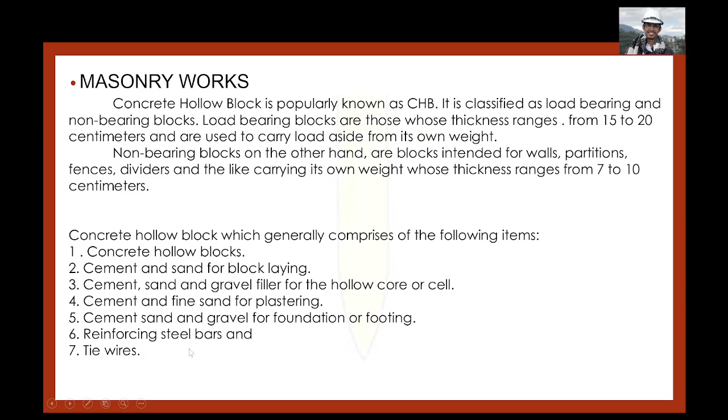So kapag tayo nagpapaasintada, or CHB laying, may mga bakal tayong nilalagay dyan. And also we have tie wires or yung alambre natin.

So we are to estimate masonry by area method, to solve for the number of CHB, kung ilang CHB ba yung kailangan natin sa isang area. So, typical CHB properties: we have the length of CHB that is 0.4 meters or 16 inch. And the height is equal to 0.2 meters or 8 inch. So, 8 by 16 inches ang size ng CHB natin.

So, thickness, depende yan, may 0.1 meter, this is 4 inches; 0.125 meter, this is 5 inches; 0.150, this is 6 inches. So in 1 square meter, there are 12.5 pieces of concrete hollow block. So this is our factor, 12.5 pieces per square meter. So in 1 meter by 1 meter, kailangan natin na CHB ay 12.5 pieces.

Next, we have the mortar. So ang mortar natin is dalawa, no? We have the mortar fill and we have the block laying mortar. So, for mortar fill, yun yung nilalagay natin in between the CHB, yung mga butas-butas niya, yung nandun sa loob.

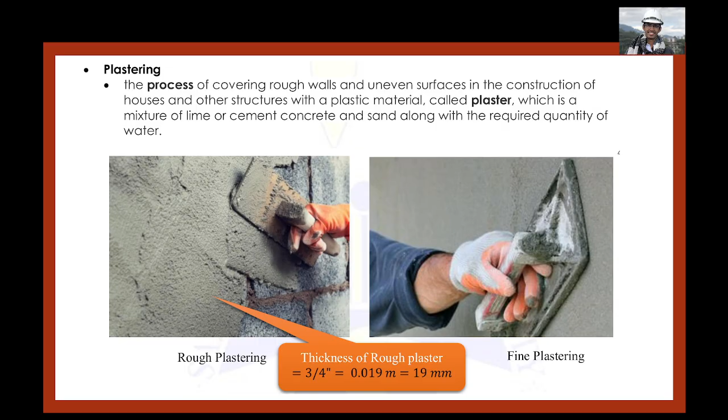So sa plastering, class, we have rough plaster and we have fine plaster. Rough plaster is the combination of fine sand and cement, and yung fine sand natin dito is yung nabistay. For fine plastering, this is just cement and water.

For our example, we have a wall here with a length of 6 meters and a height of 3.3. So determine the masonry works for the given wall section using 4-inch CHB. The wall is plastered on both sides. So napalitadaan siya on both sa harap at saka sa likod. And we are to use 4-inch CHB.

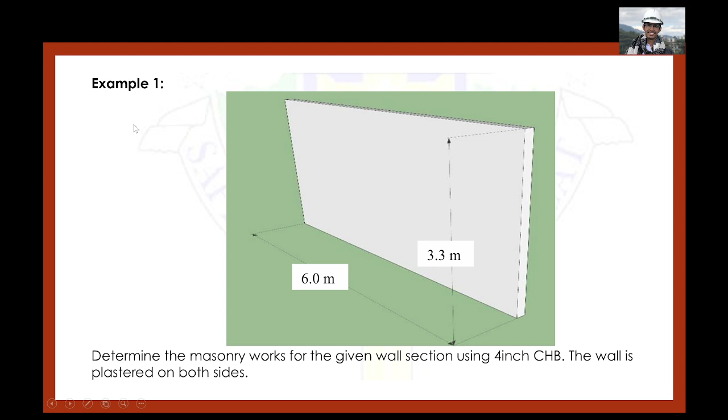So for our solution, we are to first get the number of CHB, kung ilang CHB bang kailangan natin for that area. So ang area ng wall natin 3.3 times 6 meters. That is 19.8 square meter. To solve for the number of CHB, we just multiply it by the factor 12.5 pieces per square meter. So the number of CHB is area times our factor: 19.8 square meter times 12.5 pieces per square meter. Cancel yung square meter, lalabas na lang yung pieces. We have 247.5. We rounded it off to 248 pieces.

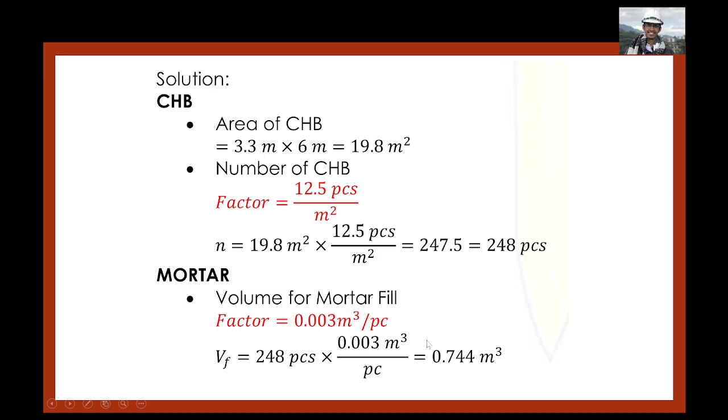Now for the mortar, again, dalawa yan, volume for the mortar fill. It is based now on the number of CHB. So we just multiply, since yung factor natin ay naka-cubic meter per piece. So the volume for the mortar fill, we have 248 pieces of CHB times the factor as per our reference, 0.003 cubic meter per piece. Cancel yung piece, we have cubic meter. So volume is 0.744 cubic meter.

Then we have the volume for the block laying mortar. To solve that, we just multiply yung number of pieces ng CHB times dun sa factor natin. We get 0.124 cubic meters. So the total volume for mortar for CHB, yung mortar fill tsaka yung block laying mortar, up to 3 decimals, we have 0.744 plus 0.124, that is equal to 0.868 cubic meter.

Then to solve for the number of bags and how many cubic of sand. The default class of mortar is class B. May mix classes tayo dito sa mortar and plastering; it's the same for mortar and plaster, the combination of cement and sand. So 1:2 we have 18 bags of cement and 1 cubic meter of sand. Pag sinabi natin 1:2, 1 part of cement, 2 parts of sand, or 1 bag of cement and 2 cubic feet of sand. So pag class B ang gagamitin natin, we have 1 bag of cement is to 3 cubic feet of sand.

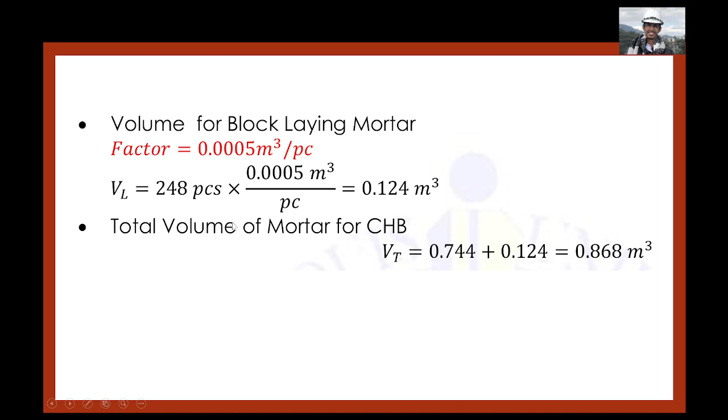So for the cement, na-compute natin na volume is 0.868 cubic meter. We are to multiply it by 12 since ang gagamitin natin ay class B, so 12 bags per cubic meter of mortar, not concrete. We have 10.416 bags. Then for sand, 0.868 times 1 cubic meter of sand per cubic meter of mortar. That is 0.868 cubic meter also.

Then for water, we assume 6 gallons of water per bag. Gawin na lang nating factor ito, 6 gallons per bag. So we have 62.469 gallons. Next, we are to solve for the plastering. Area to be plastered, we have 3.3 times 6, we have 19.8. Since it is plastered on both sides, times 2 mo ulit yan. So the total area now will be 39.6.

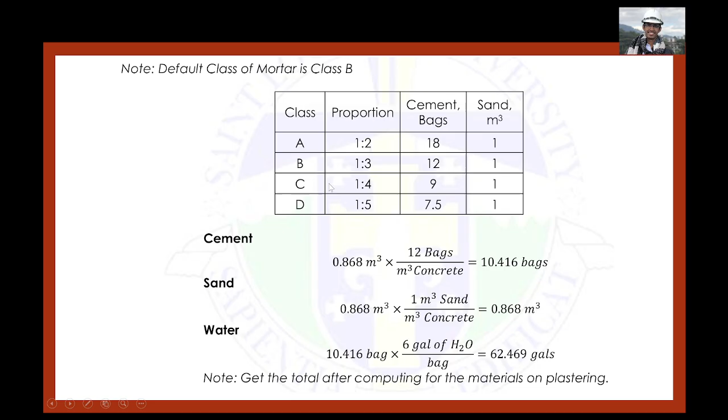Most walls are plastered on both sides. For the volume of mortar for plastering, that is 39.6 square meters times the thickness of our plaster, which is 19 mm, or 0.019 meters. So we have a volume of 0.7524 cubic meter. Ang class natin is 1:3 proportion. So the volume for plastering times 12, we have 9.0288. Then for sand, we have 0.7524 cubic meter times 1 cubic meter of sand per cubic meter of mortar for plastering, times a factor here.

We add an increase of 33% due to the presence of gravel on river sand. Meron tayong 33% since yung sand na i-order mo for plastering, sa actual site kailangan pang bistayin, so kailangan mong mag-increase ng volume. Kasi yung buhangin, bibistayin pa yan kapag gagamitin sa plastering, yung fine sand natin. So times 1.33, that is the 33% increase. You have 1.001 cubic meter. Then your water: 9.029 bags times 6 gallons of water per bag, we have 54.174 gallons.

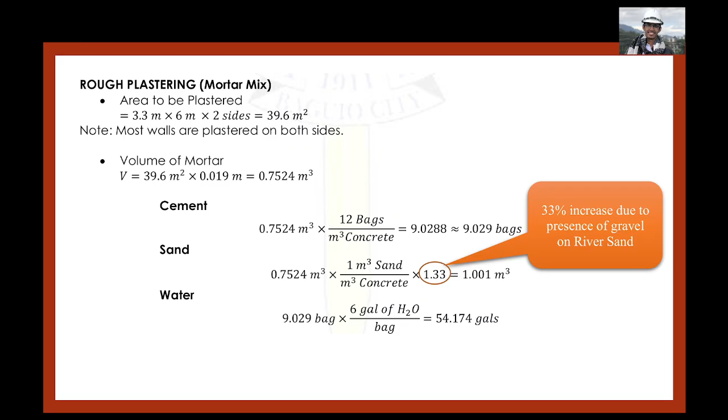So again, 39.6 square meter yung ipa-plaster natin for fine. So number of 40 kilogram cement bag. Yung magiging factor natin dito naka per square meter, ang makukonsume daw natin na semento is 2.5 kilograms per square meter for fine plastering. So you just multiply your area times 2.5 kg per square meter. And ang one bag natin ay 40 kilograms. So you have 2.475 bags if we are to do fine plastering dito sa ating given.

Okay, so for our summary, we have the total cement: 10.416 for the block laying, for the mortar fill and for the mortar layer. Then 9.029 bags for the rough plaster and 2.475 for the fine plastering. We have a total of 21.92, then we round it up to 22 bags of cement. For the sand, we have 0.868 plus 1.001, so we have 1.869. I-2 decimal na lang natin itong sand: we have 1.87 cubic meters.

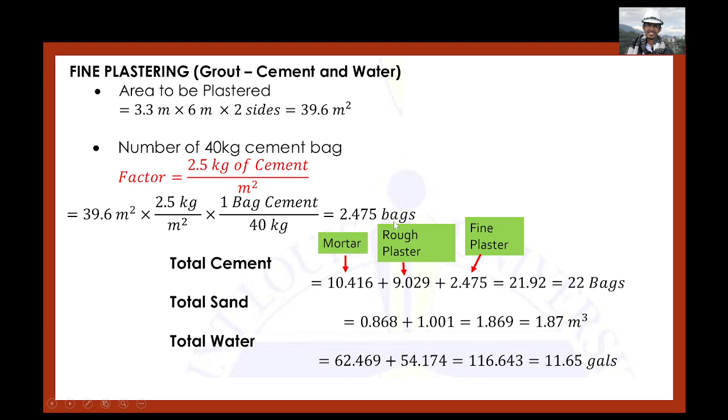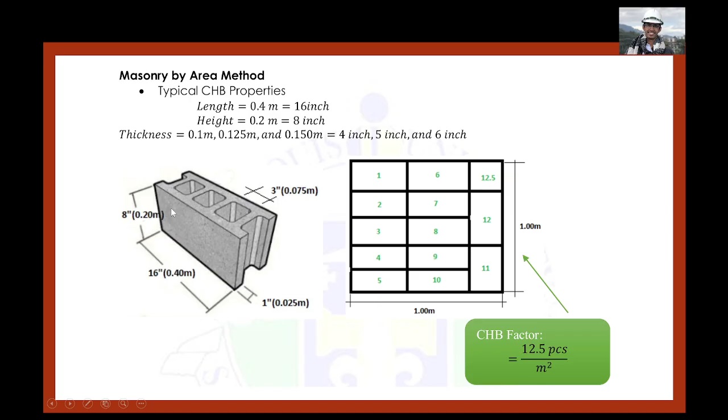Since ang spacing natin vertical is 0.8, or 80 centimeter, we draw a 1 by 1, 1 square meter, 1 meter horizontal, 1 meter vertical. Ang vertical spacing natin ay 0.8, so maglagay tayo ng bakal dito, then again 0.8 na spacing. Then for our horizontal bars, 3 layers of CHB. Ano ba yung size ng CHB natin? We have 0.2. So the height of your CHB is 0.2. Kung tatlong layer yan, 0.2 times 3, you have 0.6.

So every 3 layers, meron siyang bakal. This is 1 square meter. May bakal ka dito, sagad. Tapos 0.6, tatlong layer ng CHB, then bakal ulit. Dito wala nang bakal kasi 1 square meter lang to. You have 0.6 plus 0.4 is 1 meter, at may natitira pa tayong 0.2 meter. Yung number of steel bar per square meter, depende yan. Yung iba naglalagay every 2 layers ng bakal, and for vertical bars minsan 0.6 naman ang spacing. So siyempre, mas maraming bakal sa isang square meter.

But for this example, if you are to count the length of bar per square meter, we have 1 meter, 0.6 plus 0.4. Then we have another 1 meter. Then yung pa-horizontal, meron tayong 1 meter and 1 meter. So therefore, we have 4 meters na bakal ang magagamit sa 1 square meter. Then on the given, meron tayong additional na 10% for splicing. Pag magdudugtong tayo ng bakal, i-splice natin siya, mag-overlap sila, lapping splice ang tinatawag. So we multiply it by 1.1 for an increase of 10%.

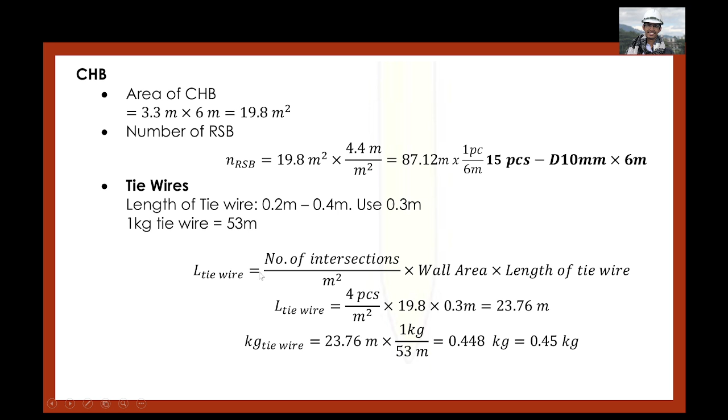For the water, please disregard this, our volume should be 116.65. So replace this with 116.65, and of course the price will also change. Then for the 10 mm by 6 meters, we have 15 pieces. The price ranges from 140 to 160. If you use 160 pesos, you have 2,400.

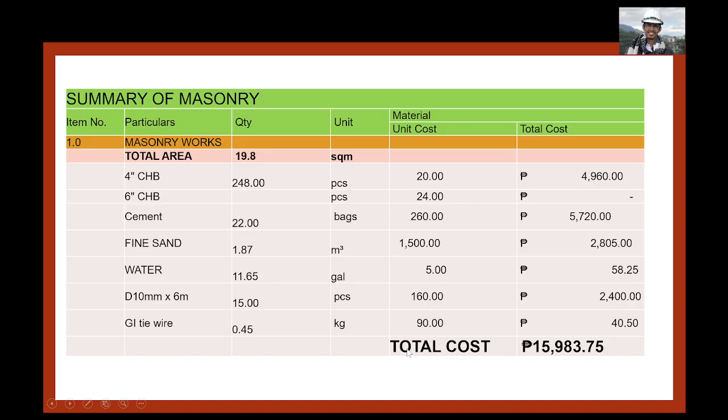And our GI wire, 0.45 kilograms times 90 per kilogram, you have 40.5. Then you have the total cost. So that's it for our masonry works.